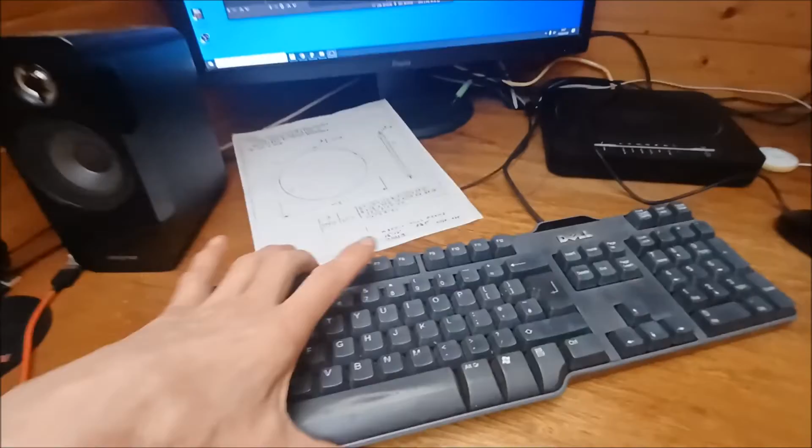It's really rainy and miserable outside, so I have got my K350 plans here, which I'm kind of using as a sort of a reference, and of course a cup of tea. So recording, yeah it is.

Right, so this is what I'm going to do. I'm going to model up a 3 foot by 4 foot, because I'm basing this on the sort of K250 design, except I want it to be a 200-meter boat. So the first thing I'm going to do here is switch to the PSUBS design calculator, and if you go for an unstiffened cylinder, this is totally just a round tube, and I'm going to go for 36 inches.

My outside diameter, my length is 48 inches because it's all in imperial measurements, and my cylinder thickness, I've done this already, 0.394, that is 10 millimeters. Calculate, this is the maximum pressure ABS rules, so maximum pressure of 293 psi, 658 feet. 658 feet in meters, I don't really work in feet, 200 meters, right?

So I think that according to this anyway, a 10 millimeter unstiffened cylinder would be good to 200 meters. So with stiffeners, it should be a complete beast. Now, what I want to do is just see how that actually works out within the simulation environment. In fact, let me just show you this. I did one earlier here.

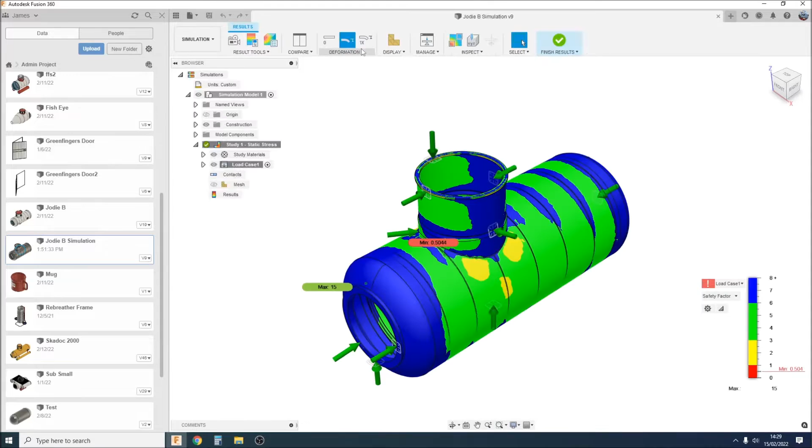Now, this is Jodie B. This is the pressure hull. This isn't exactly a totally correct model. And it says here, the applied loads may cause your design to deform permanently. I've applied a load here, a static pressure of, what did I give it? 131.4 psi, which is 9 bar. That's its maximum diving depth of 100 meters.

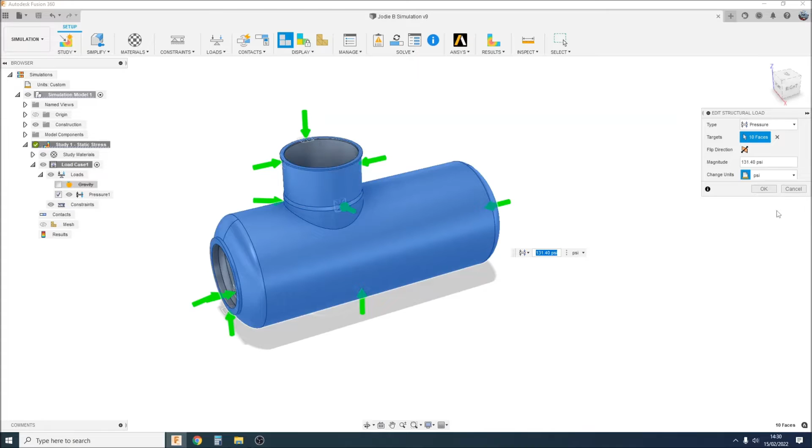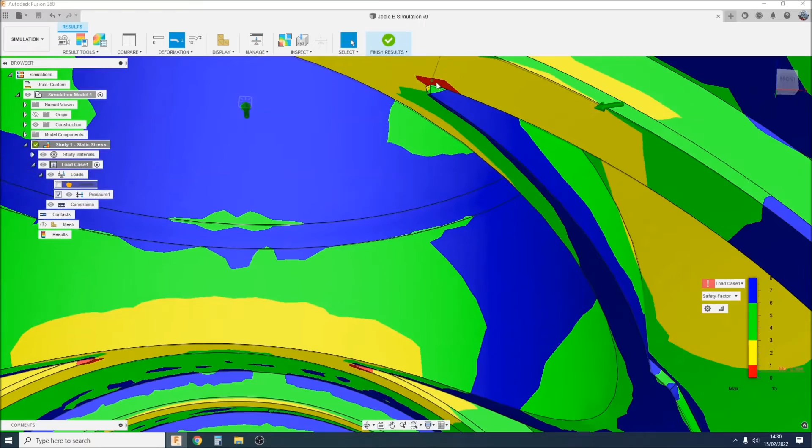Now, I've given it 9 bar, not 10, because there's 1 atmosphere of pressure inside, which this model isn't taking into account. I could have given this 146 psi and then put 14.7 psi pressure inside, but it's really awkward to select all the faces. And it's really annoying, because you can see there's just this little bit there. If I go to safety factor there, it's just on these little corners here.

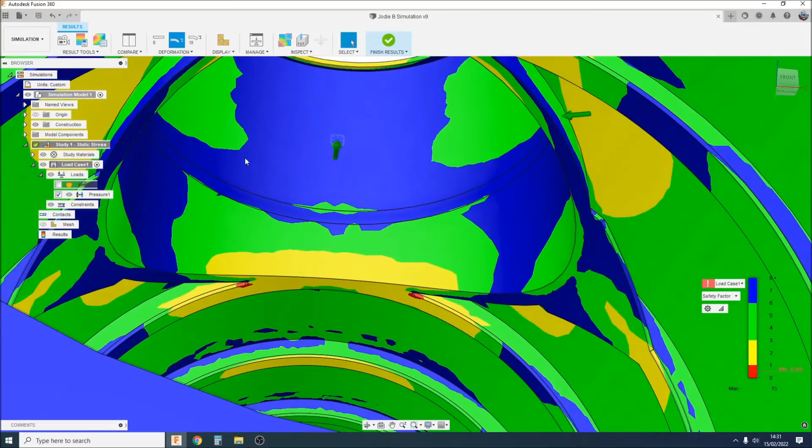And I even smoothed the corners out, thinking the point was causing a stress riser, but those bits are giving it this failure mode. Now this is a trusted design, so this should work. So I don't know whether this is what they call a singularity in the software. I honestly don't know, but look at it. The whole design is super safe. It's all green and blue, apart from that little bit. So I'm not sure what happened there.

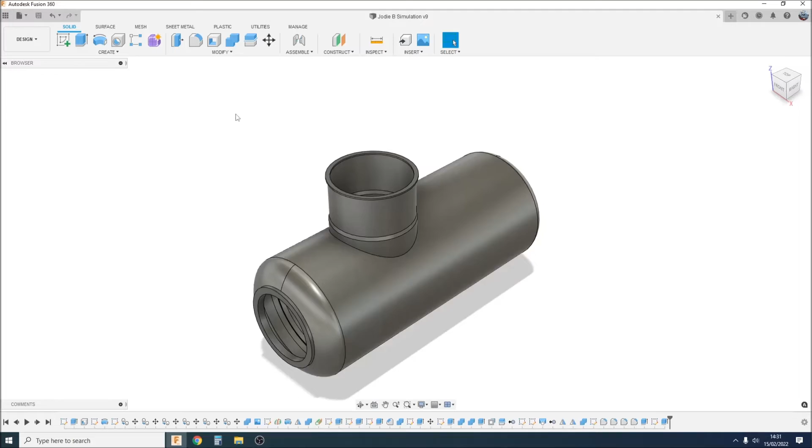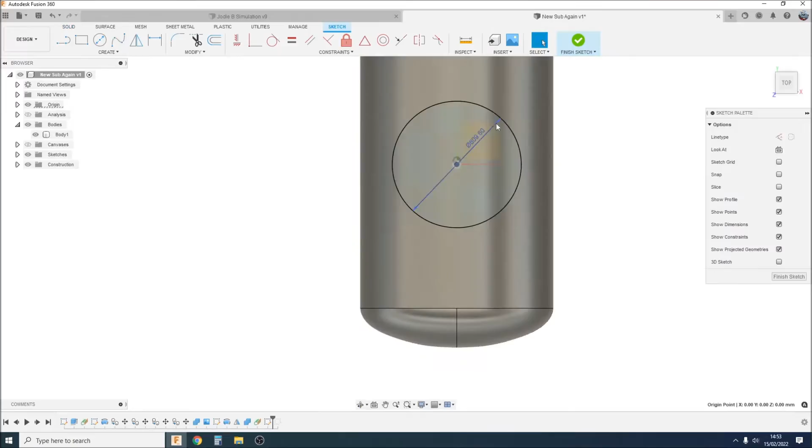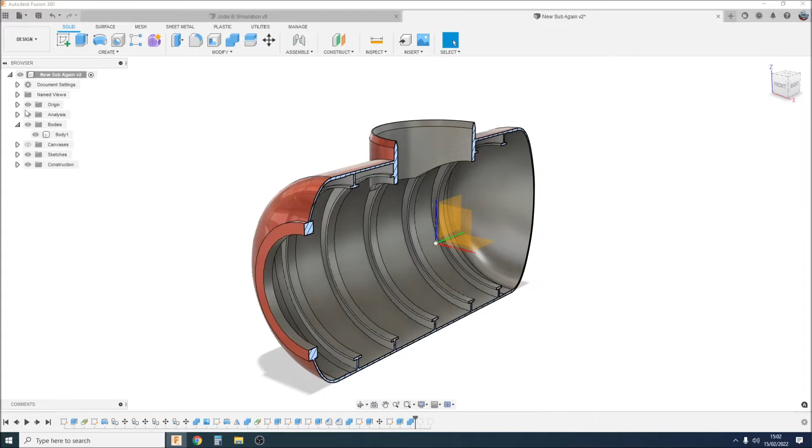Right. Enough blabbing. Next one. So I'm going to go for a new design. Just to make it look a bit nicer. Right, simulation mode, static stress, study materials. I'm going to change this.

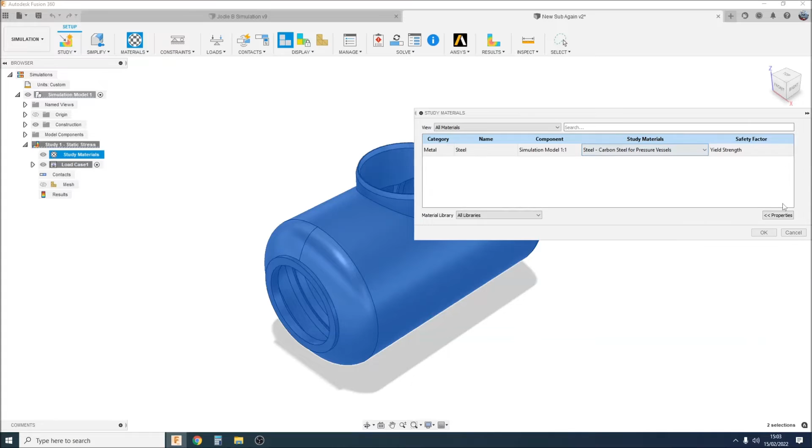Now, I've been trying to find what the equivalent of ASTM A516 is, which is what Jodie B is made of. But that's not in the list, and I can't find something that translates to all of these other ones. So there is one here, steel for pressure vessels, so I'm going to use that one. So we don't need to simplify the model. I've chosen my materials, constraints, right. I'm going to go into settings and say remove rigid body modes. That means it doesn't need any constraints, so it's just floating about.

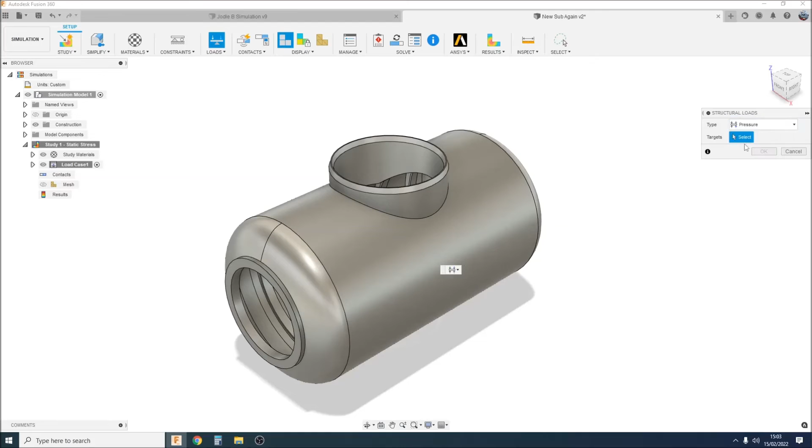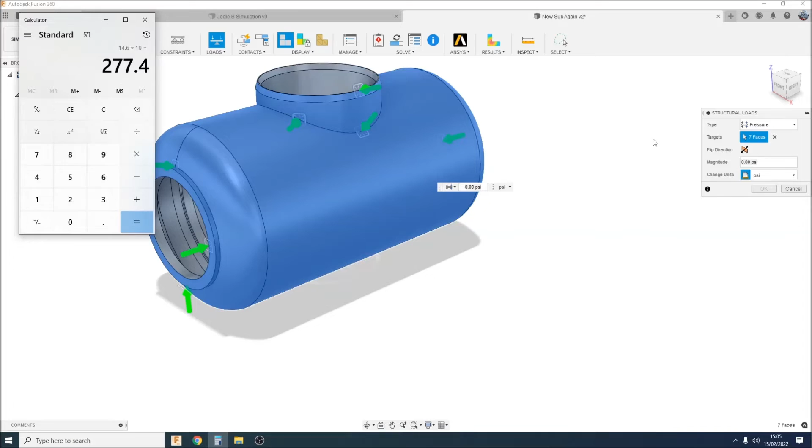And what else am I going to do? Loads, I suppose I better put some loads on. Pressure, targets. Right, let's go. So that, and there, and the one at the back, that, and that. Right, so I want to put in a pressure of 200 meters, which is going to be 14.6 psi times 20 bar. But I'm only going to put in 19. I'll show you why. 14.6 times 19, 277.4 is what I'm going to put in.

Oops, 277.4 psi of pressure. I've only put in 19 bar because there is going to be 1 bar of atmospheric pressure inside. Now I could apply another load and do pressure and start poking about, putting 1 bar or 14.6 psi inside, but there's not really any need, I don't think.

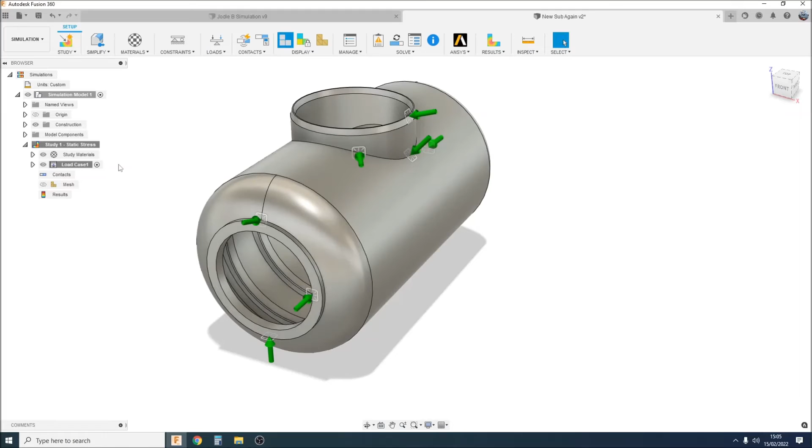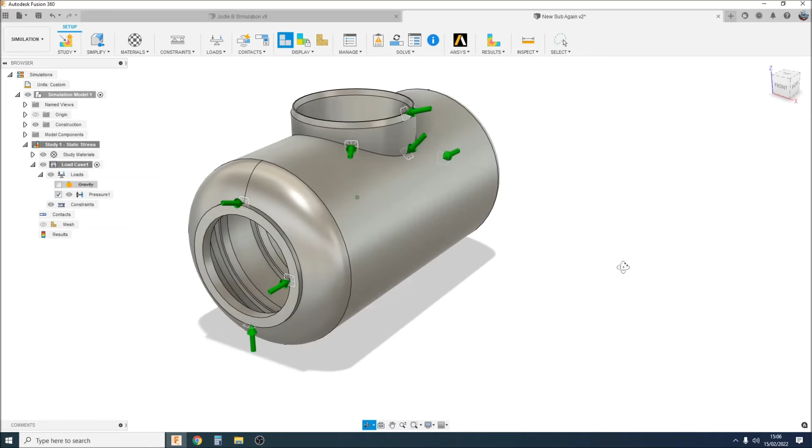Let's just have a look what other units we could have used there. Oh, we can use bar, right? Let's just go for 19 bar. That's 190 meters. Got my pressures ready. Right, pre-check. It has a little moan about the structural constraints not being there, but let's do it. Let's see what it looks like.

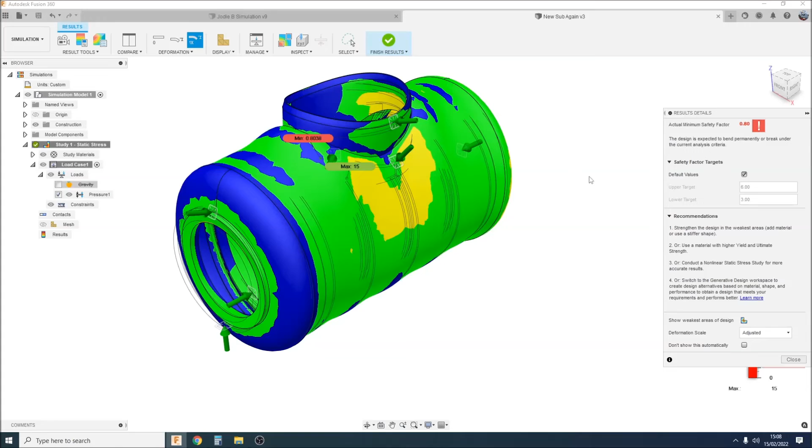So it's done, and it's come up saying design is expected to bend permanently or break under the current analysis criteria. So I don't know what I'm doing wrong, whether this is wrong. Let's just see where it shows it. Let's go to stress. Where is it moaning? It's that same point as it is in Jodie B. Right at that little corner there.

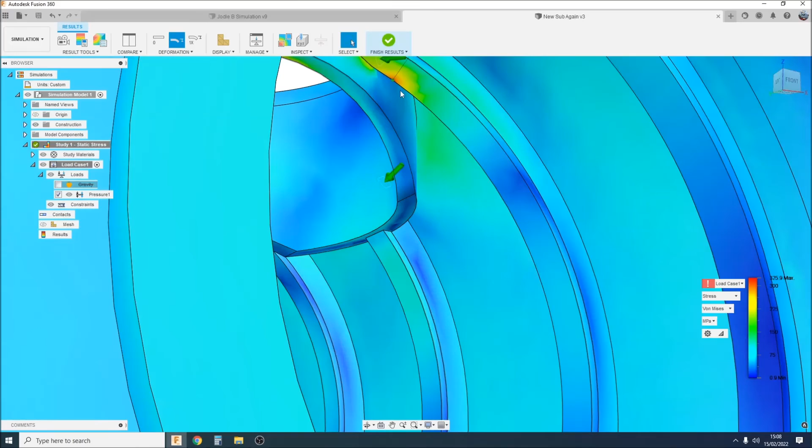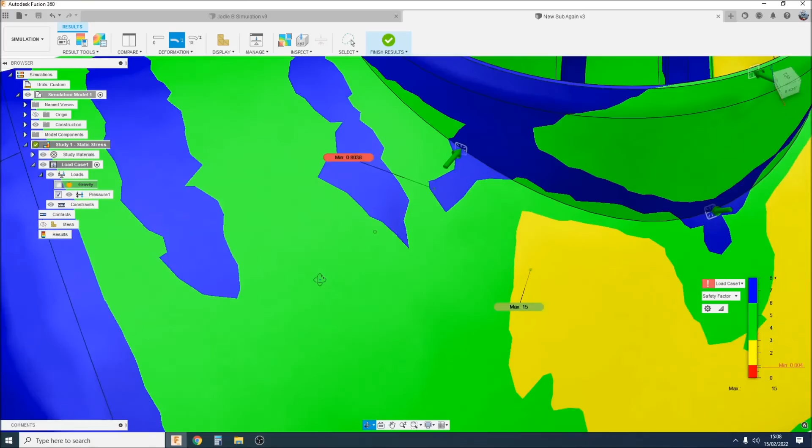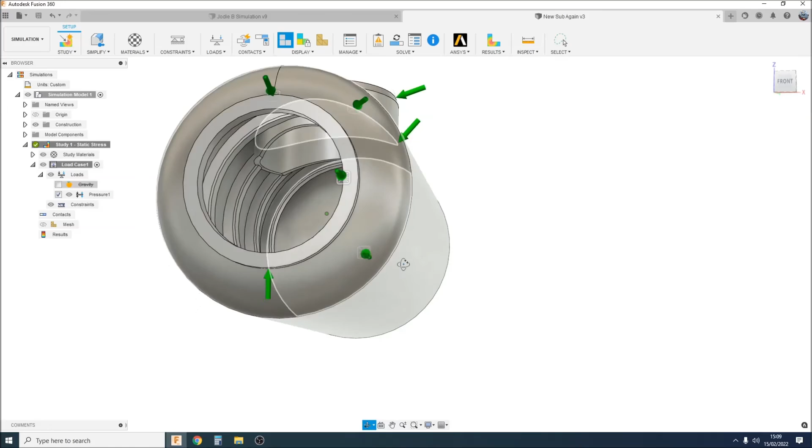So let's just look at the safety factor again. Is that a problem? I don't know whether there's something wrong with the software or whether it genuinely will fail at that point. Because everything else is good, as we would expect, really, because this is a beast of a design. I mean, this is a complete monster. Might do a bit of research on the Autodesk forums, because people are generally quite helpful, and see what people say about that.